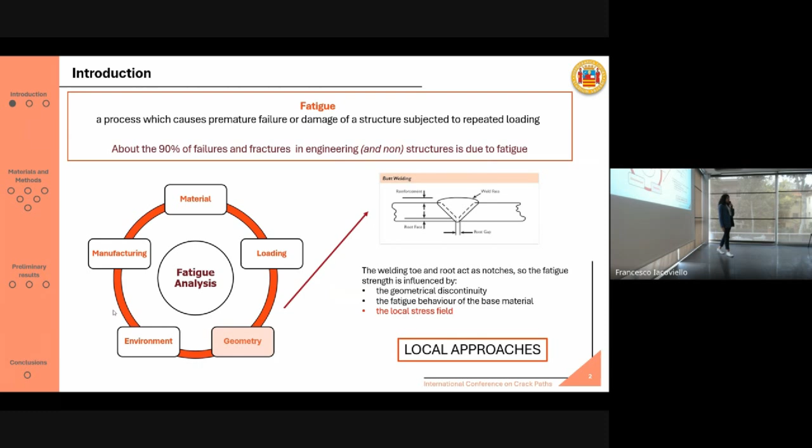Concerning the local approaches, we focus on the strain energy density method and on the effective notch stress approach. The strain energy density method is based on evaluating the strain energy density in a control volume that is typically cylindrical, surrounding the notch.

We know that the critical failure condition is usually met when the strain energy density equals the critical strain energy density value. Here you can see an example available in literature of hundreds and hundreds of welded joints that were tested.

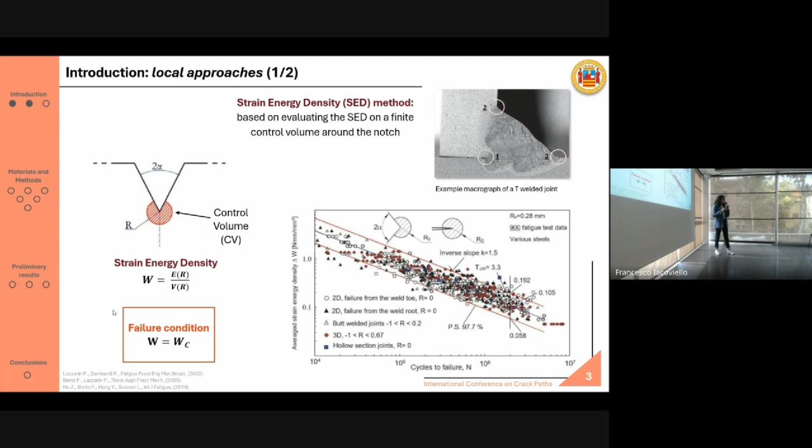Here we have the fatigue strain energy density versus number of cycles to failure. What we notice is that there is a clear scatter band that is able to comprise most of the experimental results.

Concerning the other approach, effective notch stress, this considers the macrogeometric effects which are related basically on the shape of components and the structural discontinuities that are related to the welding bead.

In this case, the notch is not considered as a sharp edge, but as a blunt notch. So we introduce a reference radius that's even called the fictitious radius. Here you can see its expression, available in literature.

It's quite commonly used. For steel, here we have the parameters that are usually used, but in general, this reference radius is about 1 millimeter.

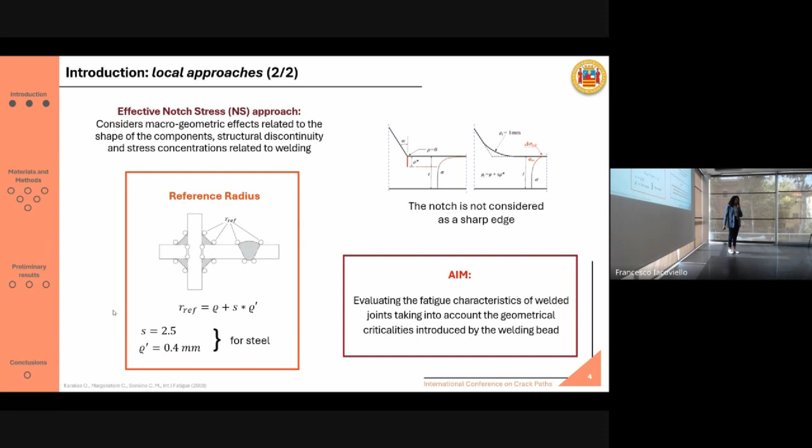In this framework, as I anticipated, the aim of this work is evaluating the fatigue characteristics of welded joints, taking into account the geometrical criticalities which are intrinsically introduced by the welding bead.

Now I will focus on the materials and methods, then I will show you the preliminary results, and wrap up with the final conclusions. Just a few words about the materials and methods.

I will briefly show you the case studies and then describe the different activities that have been carried out so far. We have the first phase, a reverse engineering phase, that allowed us to reconstruct a high-fidelity numerical model able to catch all the geometrical characteristics of the actual welding bead, because we know that the geometrical features of the welding bead may vary along the welding width itself.

Then we carried out some computed tomographies for the detection of the geometrical parameters of the cross-section of the specimen, in order to construct a numerical model and carry out a finite element analysis for the implementation of the local approaches. Finally, we carried out some experimental fatigue tests.

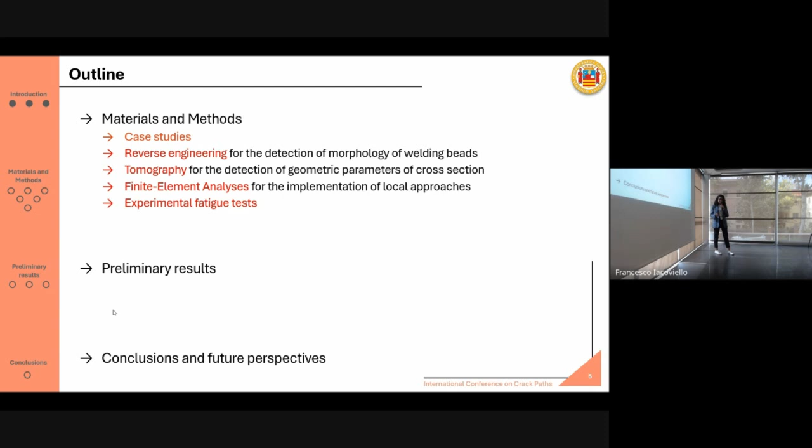Concerning the case studies, they are laser beam butt welded joints in high-strength steel. Here you can see the welding parameters and a schematic of the joint, from which the specimens, dog bone specimens, were cut out. We had 3 joints that were called A, B, and C.

From each joint, 8 specimens were cut out. 7 specimens were used for the experimental test, while 1 specimen was used for the metallographic analysis. Here you can see example pictures of 2 specimens extracted from joint B and joint C.

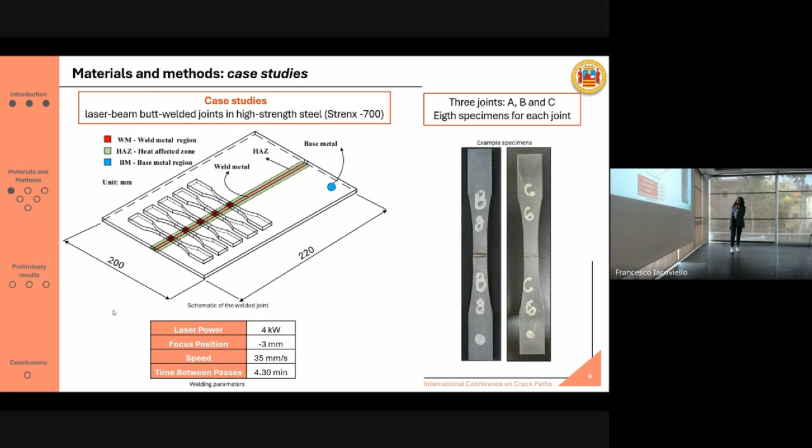Concerning the first phase, the reverse engineering phase, each specimen was equipped with given markers. The specimens were positioned on a plate that was also equipped with markers. Then we used a laser scanner, the FreeScan UE Pro, which is a small, portable scanner that is quite easy to handle.

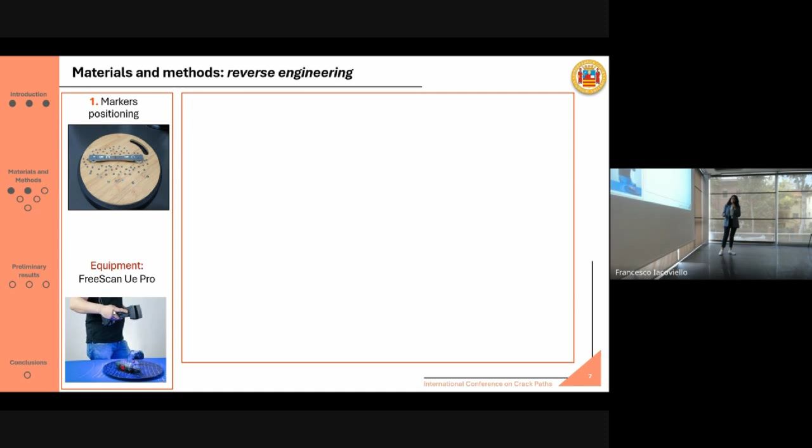By scanning the specimens, we were able to acquire the points cloud, so we got a numerical model which needed to be adjusted because there were some holes due to the presence of markers. So the numerical model was adjusted and a first mesh was created by means of the Geomagic Wrap software.

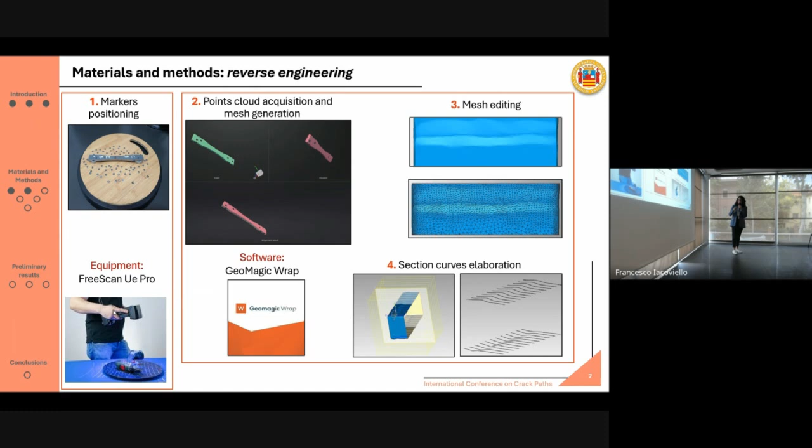Then we focused on the central part of the specimen, around the welding bead. With cutting planes, we cut this volume in order to obtain curves representing the section of the welding bead for the top and bottom surface of the specimen.

So what we did was study the section curve for the specimen near the welding bead, and we tried to evaluate the geometrical parameters summarized in this table: the vertical misalignment, the height of the welding bead, the radii at the top, both left and right, the inclination angle, the welding bead's width, and the thickness of the specimen.

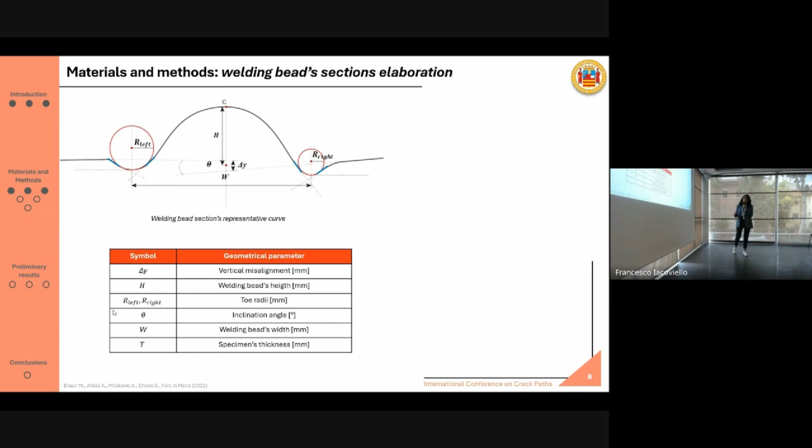So what we did was write a Python code in an Anaconda environment, essentially a study function. We studied the function representing the section of the welding bead, carrying out studies on the first derivative, second derivative, and convexity to catch all the important points that allowed us to compute the geometrical parameters.

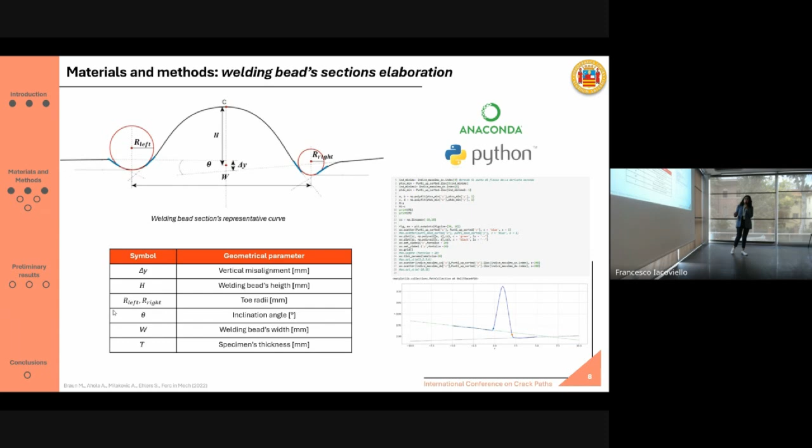Now here we have the micrographs obtained through computed tomography for the 3 specimens extracted from joints A, B, and C. We are able to highlight the fused zone, the heat-affected zone, and the base material. We can see that for the specimen from joint C, there is a clear misalignment between the plates of the joint.

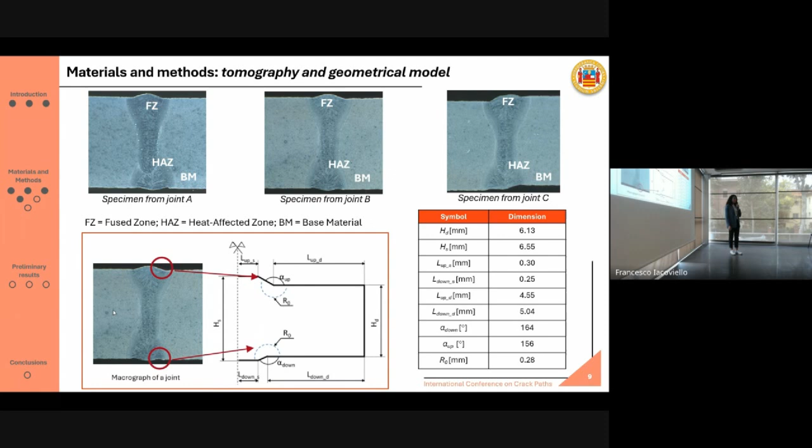Focusing on the specimen from joint B, by means of an image acquisition software, we were able to extract the main geometrical dimensions to construct this simplified geometrical model. This model allowed us to then construct the finite element model for both the SED approach and the notch stress approach.

Concerning the strain energy density approach, the control volume needs to be considered and meshed. According to literature, this control volume has a radius of 0.28 millimeters, with 8 elements along the radius.

Here the notch is considered as it is, while in the case of the notch stress approach, we have a blunt notch, so we consider a reference radius and a control radius which is slightly larger: the radius is 1 millimeter and the control radius is 1.1 millimeter. Around the notch, we have an element size equal to R divided by 20, where R is the 1 millimeter radius.

The applied load was simply a tensile load of 1 megapascal for reproducing the mode 1 loading.

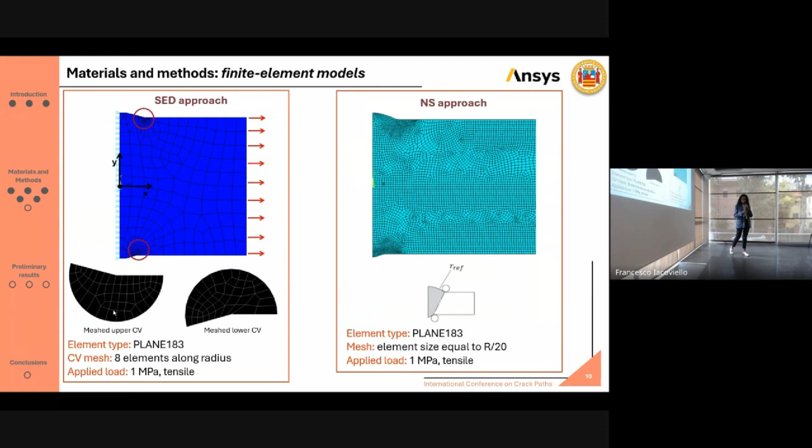Then we carried out experimental tests, first of all static tests for obtaining the stress-strain curves. Here we have the mean curve for the 3 joints, A, B, and C, and here we have the mean values for the Young's modulus and the maximum stress.

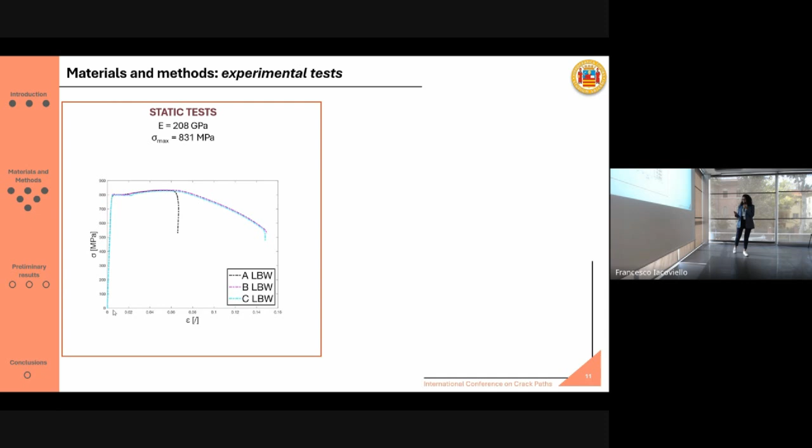Concerning the fatigue tests, they were tension-compression fatigue tests with R equal to -1 and a frequency comprised between 5 and 10 hertz. Here you can see a picture of the specimen mounted into the instrument belonging to our lab, and a picture of the same specimen after the end of the test.

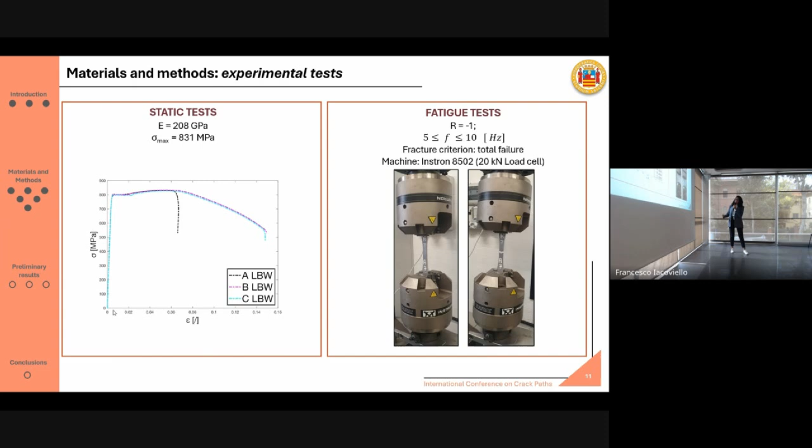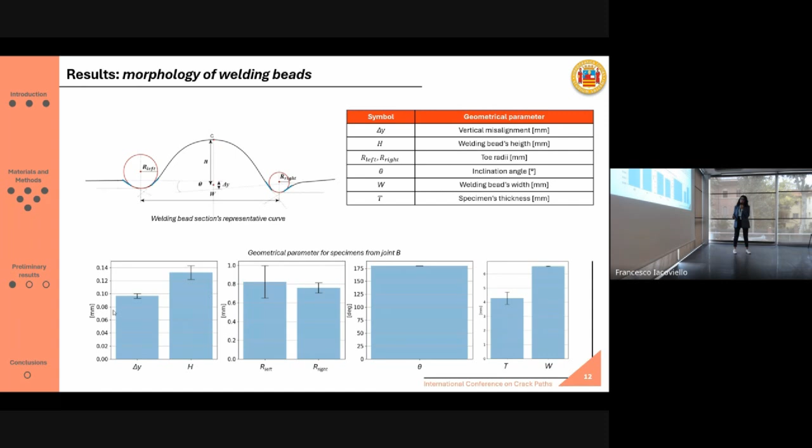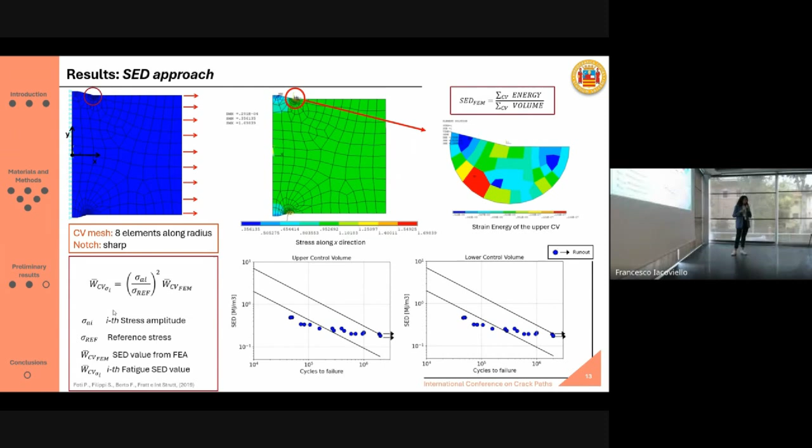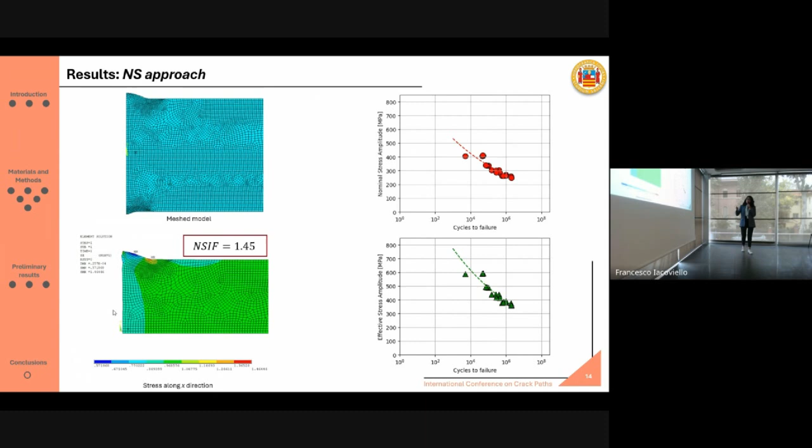In conclusion, we know that the fatigue performance of welded joints is connected to the geometrical features, and local approaches are useful to tackle this kind of problem. In this case, we analyzed specimens extracted from butt welded joints obtained by laser welding.

These specimens were first scanned in order to reconstruct a high fidelity numerical model and evaluate geometrical parameters of the welding bead. We carried out some simple finite element analyses and experimental tests in order to link in some way the experimental and numerical results.

What we noticed is that the most scattered geometrical parameter is the toe radius, both left and right radii actually, which may represent the most influencing geometric discontinuity. In addition, there was some correlation between the geometrical data that we evaluated through reverse engineering and the ones usually used, for example, in the notch stress approach.

Concerning future developments, first of all we would like to calibrate the numerical model, taking into account the actual geometrical parameters that we evaluated through reverse engineering. Then we would like to correlate the welding parameters to the geometrical features and finally to the fatigue strength, in order to be able maybe to predict the fatigue strength even for untested specimens.